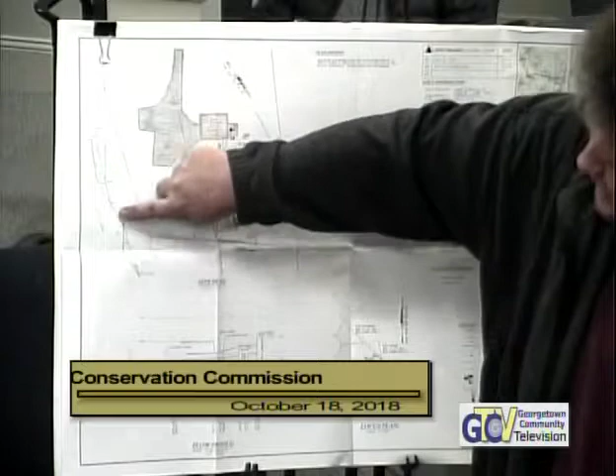We have green cards, I see. Mr. Rollins is at 68 Jewett Street. The property has a 3-bedroom dwelling, an existing system, which is located right here, that is in failure. We have some resources. We have a wetland in the green, and top of bank in the dark blue. This is the 100-foot buffer from the wetlands, and this is the 200-foot riverfront area.

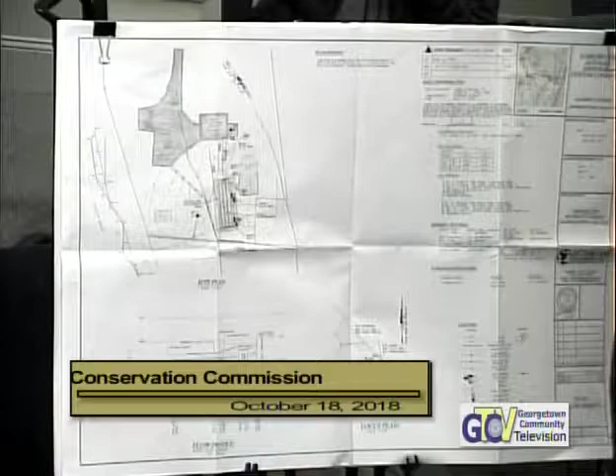We're proposing a new system, including a septic tank and a leach field. It is entirely outside of the 100-foot. So we're in the riverfront, but outside the 100. Correct. They will need to pass a little bit through the 100-foot to get to the site for construction, but all the work is outside.

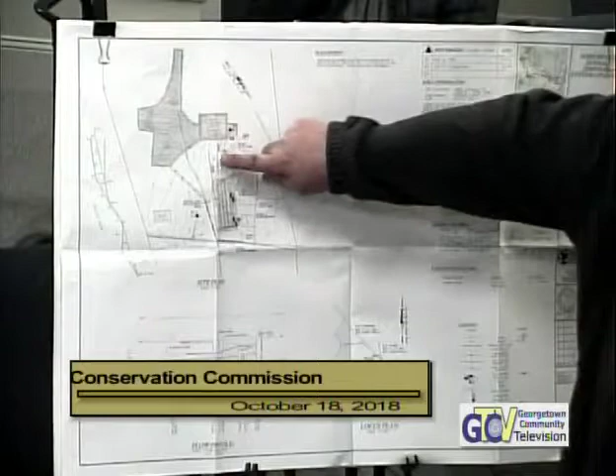And where was the existing system? The existing system is right here. It's essentially the same spot, reconfigured. The septic tank is in the same spot as proposed. Are they going to reuse the septic or crush it? No, they're going to replace it.

And you've been out there, Steve? So we just got the DEP number, so we're good to go. There's another project that he's here for that we just got. Same terms. And you said you've been out there, correct?

Any commissioners have any issues or questions relating to this project? Don't have any yet. And the system is in failure. Is that a standard system or a different type? It is stone and pipe.

Are there any abutters to 68 Jewett Street? If you would like to make a comment, you may do so if you identify yourself for the record. Seeing none, there are no further questions.

I would entertain a motion to this particular site. May I ask a question? Sure. Sorry, I didn't hear, what is RA on this plan? Riverfront area. That's the limit of the 200 foot from the riverfront. Correct, great, lovely, thank you.

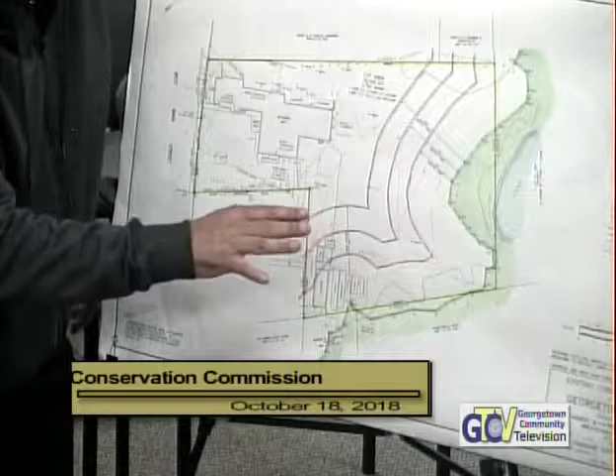We can't really talk about this. I didn't want to get into details. I know, but that's where it's going. Exactly, so if you could not give me details. Sorry, I'm not trying to answer the question that way, I apologize. That's fine, I'm sorry, I should have phrased my question differently.

So the question is, back to square one: does the commission want to vote now, or do you want to continue? You guys got to—see, the problem is that only 2 of us have read the report. So that is the sticking point. It has nothing to do with the lines or the vernal pool or anything like that.

Steve's comments also have to do with just the documentation, not changing the line, but changing just the information on the plan. I mean, that's administrative stuff, but it's part of the process too. So the applicant can ask us—by definition, they can ask us to vote tonight on anything, on a hearing.

They can say they want to vote, or if they're willing to let us continue to the next meeting. I would say that's a bad idea, as only 2 of us will vote for it, and then they're locked out of here for 3 years.

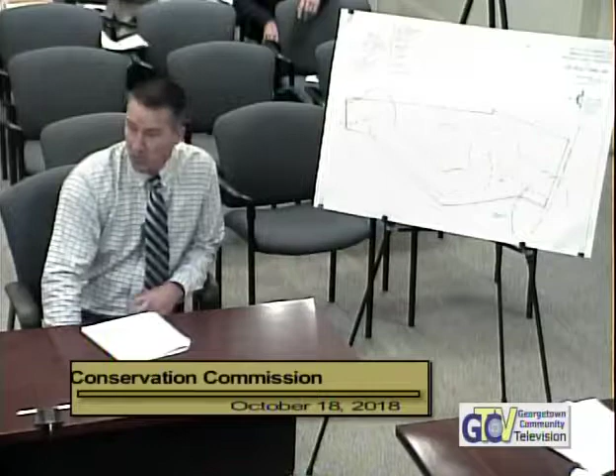She sent an email to Steve and I. So the plan has everything needed. I have read her report and talked to her about it. I'm pretty comfortable moving this forward.

Well, we all got to read it too. There were some flag changes, but again, the little details probably are not relevant. There were a few, but didn't really change much.

In an ideal world, not specific to this case, the applicant comes in, asks to do a project like this, we have a third party evaluate it, then we go out and take a look at it. But we're past our kind of window of doing that. In this case, they still might be able to in the spring.

Well, I don't think they want to wait that long. Ideally, this process gets done a little earlier in the year, and then we go out and look at the wetland line and say, yeah, we agree with everything. But if everyone's comfortable with this and the way the process is, we can absolutely move it forward. It's just that if you want to go out and take a site walk, no, we don't do that.

So what time of the summer was it when the photographs were dated with it dry? We were out there, I think, a total of 10 consecutive days, but only submitted 7. Was that in July, August? I think it was July and August. But we weren't in a drought—that's something that Jillian and I confirmed.

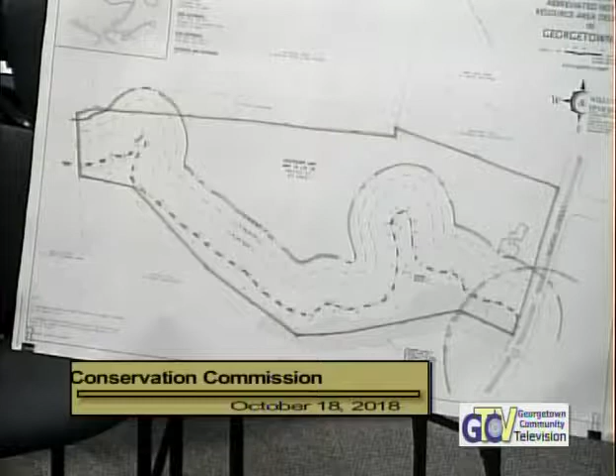I think what's happening is, because it's so low, it's just getting water that's seeping through the wetland under the road, and it's a lot lower, so a lot of it's probably groundwater. And I think it's a pretty steep bank coming down to it too, so it's probably seeping out of that pretty steep gully.

But we weren't able to document that dry. So, where our riverfront shows now is at the outlet of that culvert on the other side of North Street. It did move the riverfront boundary roughly 40 feet. But there's also an intermittent stream that feeds this pond. We got photos up here as well. It's not shown as perennial, but while we were out here, in case this came up, we documented that dry, not flowing.

Any other comments from commissioners on this particular ANRAD?

Are there any abutters to 554 North Street who would like to make a comment? Not seeing any. Okay.

Does anyone like to, my review of this, it looked fine to me.

And if anyone would like to make a motion, we can do so. Mr. Chairman, I'll make a motion that we accept the ANRAD for 554 North Street, DEP 1610865, GCC 2018-13, with the plan dated - what is the plan date? It's dated revised September 25th, 2018. September 25th? Yes. Okay.

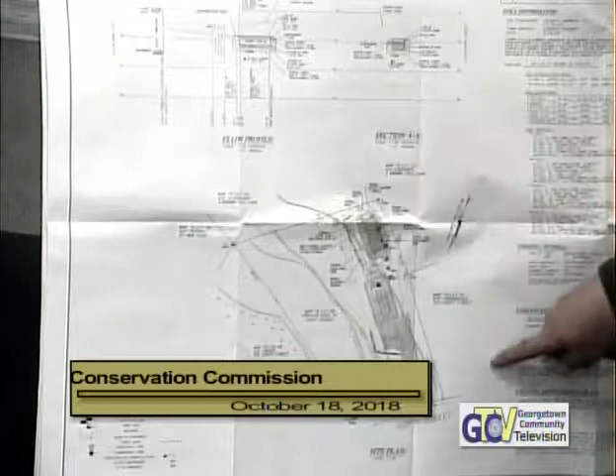This property has a 2-bedroom dwelling on it, shown here in this drawing. We have a perennial stream and wetlands. Here's the 50-foot, 100-foot buffer to the wetlands. This is the 100-foot riverfront area, and then the 200-foot, about there. This is the other end of that stream we were just talking about. Am I right? Correct.

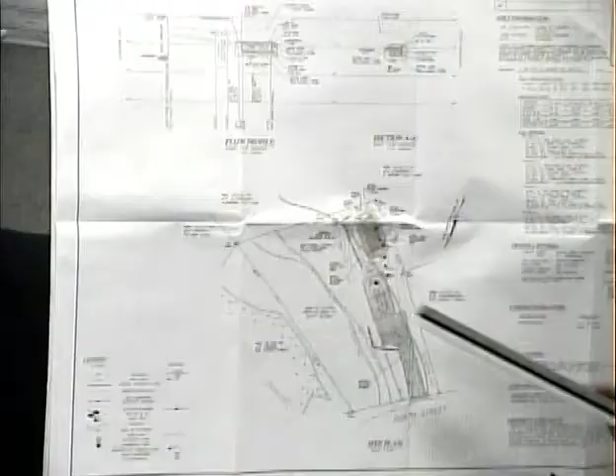The property has an existing system. We are proposing to replace the system in the same spot. I remember when this house was permitted - about 10 years ago. That's the one where the grandmother owned the lot, her grandmother left her the lot. A very skinny little house and a skinny little lot. Correct. Well, the system is in failure since then. Already, 10 years later? Wow. It is. So what we're proposing to do is utilize the existing building sewer pipe and the existing septic tank, and replace the leaching area in the same place.

Everything else is new enough that it's still functional. Is it in failure, did you say? It is in failure. We're proposing a Presby system to replace the existing infiltrator system. We're outside of the 100-foot buffer zone to the wetlands, and we are about 150 feet to the edge of work from the riverfront. As you can see, it's a fairly small lot, and we're basically as far away as we can get the system.

Steve, you've been out to the site? I have, about 10 years ago - I permitted this thing. Yeah, I mean, it's not ideal that it's in failure that early, but it's existing and it's an improvement, you know. They've got a system in failure.

So the Presby system is actually smaller than the existing one, I'm assuming? Or longer and narrower? No, it's actually almost the exact same footprint, within a couple inches. The infiltrator and the Presby both give you the same reduction from a standard stone and pipe system.

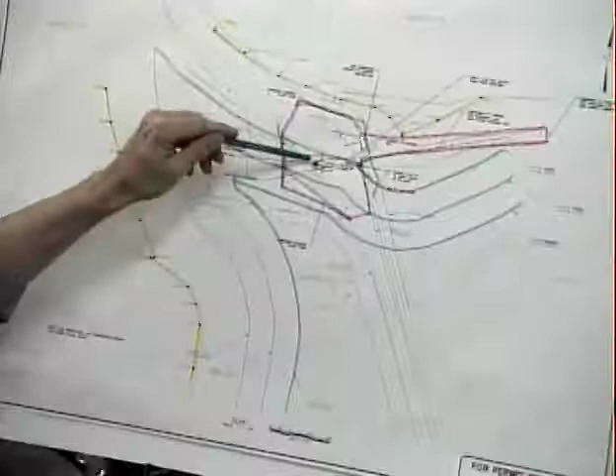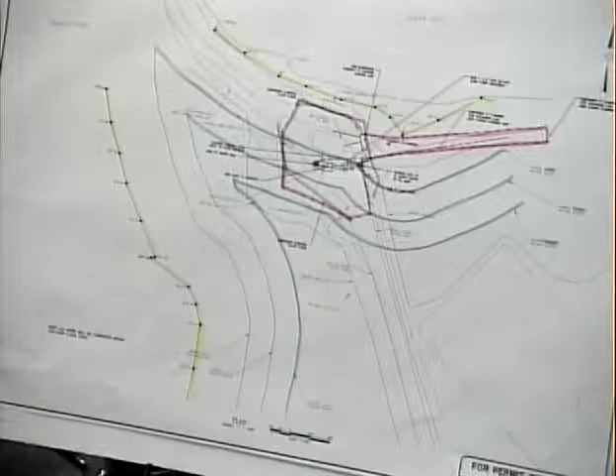So the parts of the construction and installation of the production well will be: number one, the installation of a 36-inch diameter production well. Next to it is going to be an underground vault or chamber which will house sensors, and these will feed data back to the existing pump station. The well will be connected to the existing water main on the site, which runs underground in the middle of the road, so this is all underground work. We're going to add a generator, and remove a propane tank in this area.

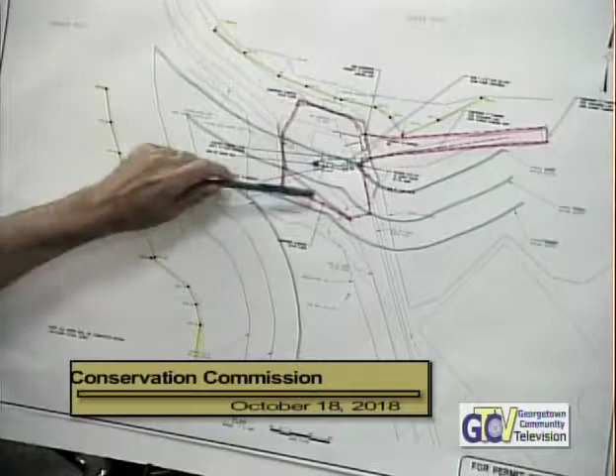So this is all within already impacted impervious area. And what is fueling the generator? The generator, it's natural gas. Okay. I can't have a natural gas spill, that's why I ask. Yep. So these are all the parts for the construction and installation, again all within paved area. We're not going to be impacting or disrupting any natural vegetated area.

Can I ask, where are we, where is this? West Street, past the soccer fields, past the main building, down that road. There's a brick building there, right? Yes, past the soccer fields. Is it inside a fenced area, way out where you drive? There's just a picture of the brick building, this is kind of down at the corner. That's the one close to the road, correct? Mm-hmm, yeah, it's not the farthest one. There's one that you look way out into the wetland, that's the one close to the road, I think.

Yeah, okay, so this is a less sensitive area than I was thinking of the other one. I mean, it's still pretty close to the wetland, and it's good that they're pulling that propane tank out that's in a wetland. Pretty much. Right. Yeah. So, okay.

I had a question related to that. Is that area already cleared where the water's gonna be pumped? Is that long stretch already cleared, or is there a long opening there, or are you gonna create that? I don't believe it's a cleared area, but we don't need it to be. You can just snake the line through, right? You don't have to cut it, it's just a flat 6-inch lay flat hose that you can unroll. So that's more defining the path of where you're gonna lay it and where the water's gonna go.

It's a man-made canal, and all it does is it leads water from the water treatment plant settling basins, and it just leads it to this larger water body to the north. Okay, so we're gonna discharge it into that man-made canal. Okay, yep, okay, thanks. You're welcome.

I checked before I came up this afternoon, you haven't been issued a DEP number yet. It's not the end of the world, it just means we can't necessarily approve it tonight, even if the commission's 100% okay with it. I just want to throw that out there before anyone starts making motions. In some cases, if the commission's okay with this, you wouldn't even have to come in for another hearing if we're just waiting for a DEP number.

I don't know if you've been seeing this, but within the last month I've had two other projects like this take forever, and I've had to contact DEP saying we're going tonight. I don't know what's going on, but I always recommend applicants get in earlier. I mean, you can only do what you can do.

So this is going to have to continue to November. Time-wise, when is the water department looking to do this? They're looking to start in September 2019. So we got a little time. It's not like they want to do it three weeks from now.

So I talked about the two facets of the project, installation and the pumping test. Next, I wanted to quickly go over the environmental resources at the site. To the north is a large body of water which was created, from what I'm told, approximately 10 years ago by beavers damming up the Parker River. So we have top of bank of this large water body, and top of bank to the west, as well as bordering vegetated wetlands to the west.

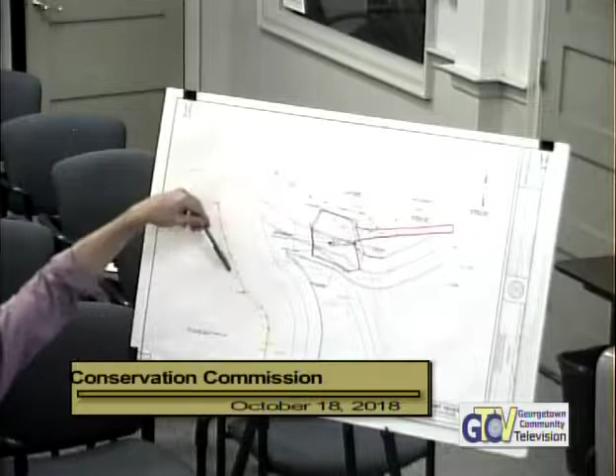So these blue lines indicate the various buffer zones. We've got the 50, 75, and 100-foot buffer zones. So you can see where the limit of work is in relation to the resources. We're outside the resources, and we're within the buffer zone.

Are they going to do anything with the old well? Are they going to close it or cap it? Yeah, once this replacement well gets online, they're going to take the old one offline. I mean, obviously you'd like to cap things like that, so someone doesn't accidentally pour contaminants, or contaminants get down into the aquifer and contaminate the whole supply. Purposeful or accidental.

So I guess you're looking for water, so you need to be that close to the wetland, you can't move it. Yep, that's right. Studies have been done, and this original well was a very successful well. So they like to keep it close because they know it's a proven area. It's just that the screens of the well and everything has gunked up over all these years, probably iron and manganese.

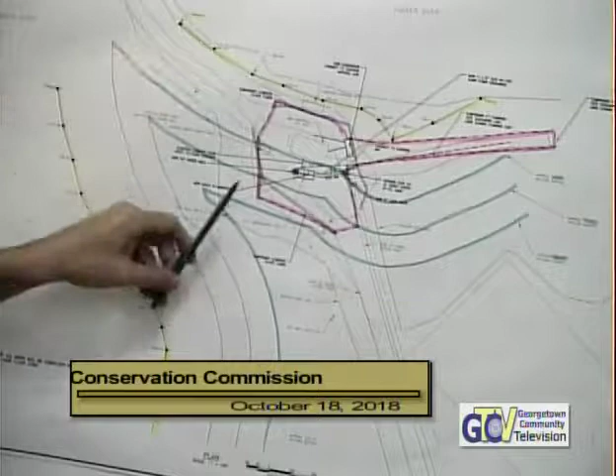So they know it's a successful area, they like to keep close by. How are you going to protect the surrounding area while you're working? You're right there in the middle of everywhere. As far as the construction phase of things, we have compost filter tubes around this area to protect any migration of material in this direction or that direction towards the resources.

Really the impacts are going to be very minimal. I was going to say, this minimal digging. Yeah, you know, new house, they're pulling out hundreds of yards. There's very little digging in the big picture. I mean, yes, it's close to the resources, and they've got to deal with the sediment they pull out as they drill, but you're not talking hundreds of yards.

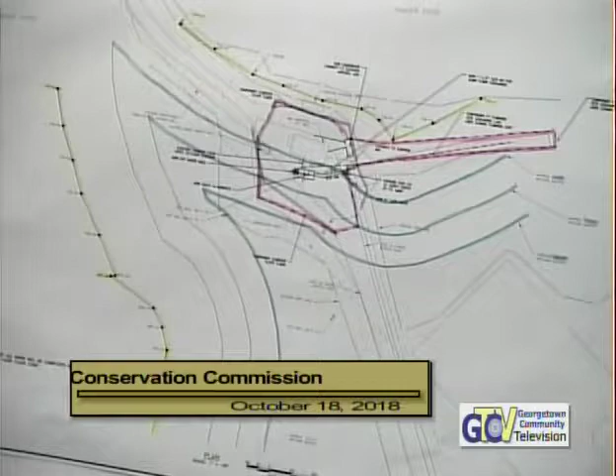And that's kind of where I'm asking the question of how deep the well is. Obviously, the deeper the well, if you're going down hundreds of feet, you're going to have a lot of stuff coming out of various layers of soil and rock or whatever. What are you doing with that? I wasn't told, but in situations like this, they always just get taken off-site by the drilling contractor.

What are the drills powered by? Is it a diesel drill? Yes, it's off the truck, so it's powered, it's a big rig. Is there any concern about dripping or leakage? I mean, there are a lot of hydraulics and gears.

It's typical, the same concerns with really any construction vehicle, like a bulldozer or anything like that. They have to have due diligence, some spill equipment, absorbent materials just in case. Do you have people there making sure that you're not leaking fluids in our water?

Yes, there is a specification we have, the environmental protection specification. It talks about not allowing refueling within 100 feet of wetlands. It talks about having to have a hazardous waste cleanup kit, a spill kit, on site, and obviously keeping an eye out for any dripping or leaking. No washing of vehicles on site.